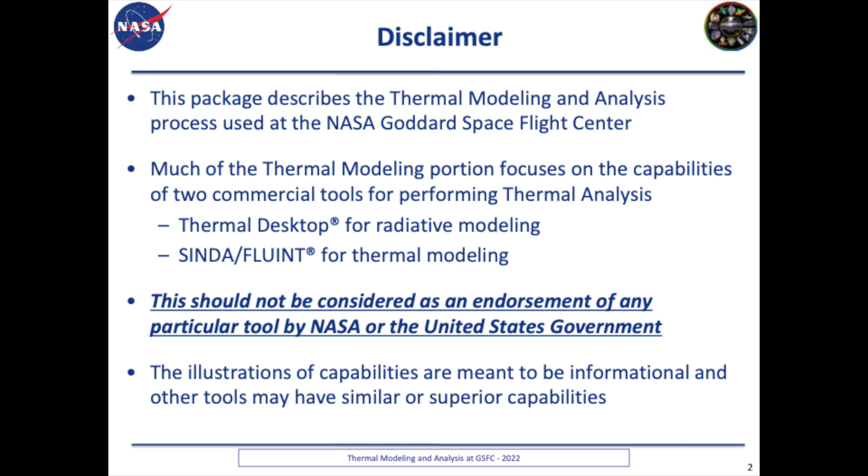All right, so we'll come now to the real part of this, which is analyzing the model predictions. This is one of the things some of our younger engineers struggle with. There's a very important difference between modeling and analysis. Modeling is: I build a model and I generate predictions. That can be done by the computer.

Analysis is the interpretation of those predictions to infer, discover weaknesses, insufficiencies, strengths in a design. The computer can't do that. It can't tell you that this is a good design, this is a bad design. That's up to you as a thermal analyst.

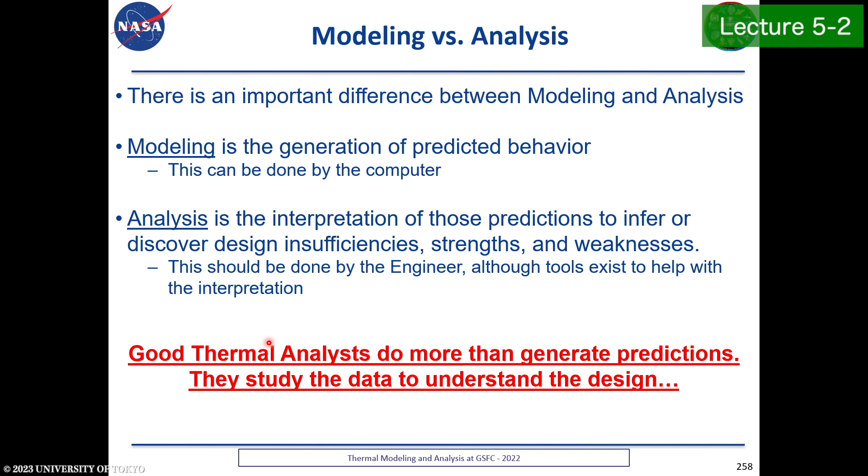So, a good thermal analyst does more than just generate the predictions. They look at the data, they understand the design, they investigate the heat flows, they truly understand the physics and make sure that the simulation is behaving as the physics of the problem dictates. So, don't think that as a thermal analyst, your job is to generate predictions and hand it off to somebody else to understand. Your job is to understand what those predictions are telling you.

So, to this end, there's verifying the results. Make sure that everything matches physics. One of the important things is, before you run an analysis, what did you expect it to do? You should not push the button to say go without any idea of what you expect. If I sized a radiator, I expect that radiator size to have given me temperatures within some range.

So, never go into it just saying, okay, I'm going to run a prediction and see what it is. Really think through before you run, what should I get out of this? Because that's the only way you can see whether anything makes sense or not.

So, we talked earlier about model correlation. That's a measure of how accurately the model predicts the actual measured values under the same conditions as your test. It does happen much later in the program because it takes a while before you get to a point where you actually have the hardware.

Doing what you can to configure your model to handle as many different cases is beneficial. You want to be able to produce the critical results that you need without the need to spend quite as much effort upfront post-processing. So if you know what you're interested in from your model, the data products that you want, you can make sure you tailor the output to give you that.

There are some post-processing tools out there, but knowing what you want before you run it lets you set it up, put it into an easy format, makes it easy to interpret. So setting up the tools to be able to post-process what you want is very useful.

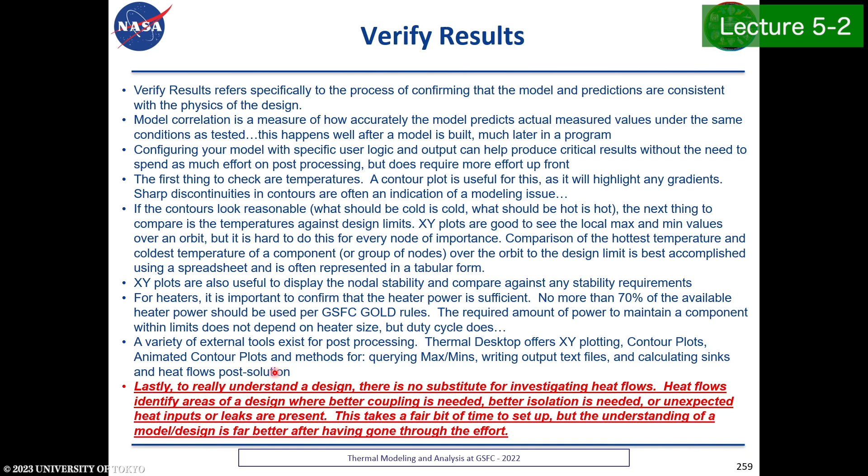You're an excellent thermal engineer when you understand where the heat's going throughout your design. So always strive to understand that and then be able to communicate it. When somebody asks you, well, why is this doing this? Well, because the heat went from here to here. This is what's causing us to be hot. I think somebody once said that temperatures are the footsteps left behind from heat flow. And I thought that was an insightful way to put it.

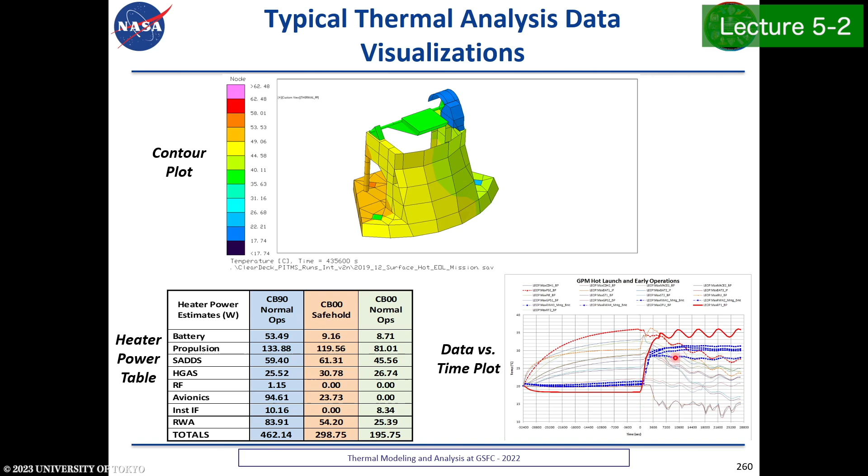So here are some typical data ways that you might look at things. This is a contour plot, so I can see what my temperature ranges are, what's cold. Here's a heater power table, so over different cases, how much heater power was used. Here's an XY plot of time versus temperature. This was a launch analysis, so we turned on some things and we launched. Some things got hotter, some things got cooler. So you get to see what the temperature evolution over time looks like.

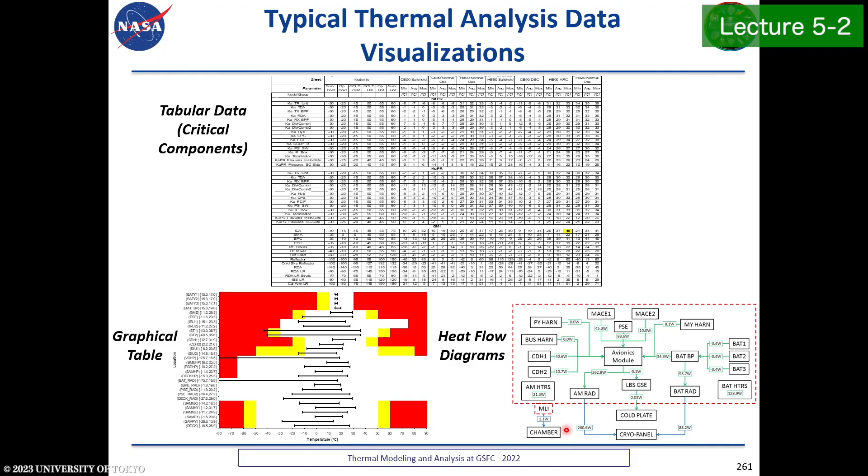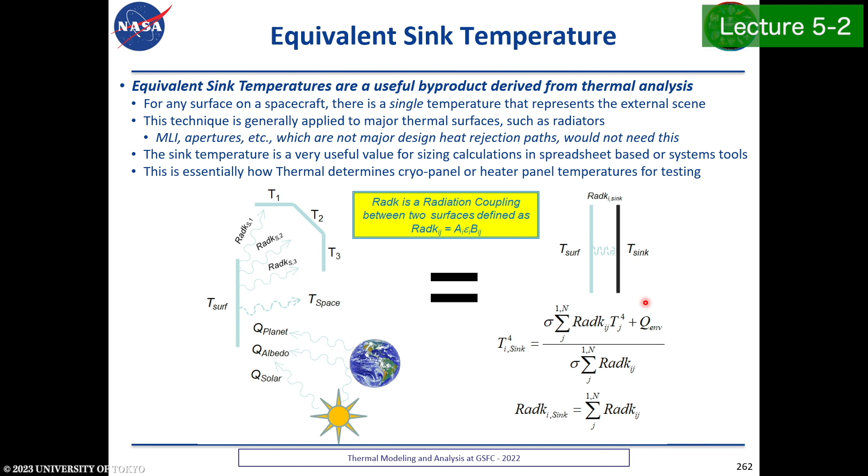And so if you go through and do all the math, it's basically the rad K times the temperature to the fourth of the surface in the field of view, add to that all the environmental backloading, and then divide that by the sum of the rad Ks, and that's equal to the sink temperature to the fourth. So sometimes you may have to further degrade the sink temperature. This is making an assumption that the emissivity that you would have here is 1. It's fully absorptive, but we all know that you're not going to get a cryo panel all the way up to 1. So you might have to have a slightly colder sink for the fact that you don't have full absorption at this cryo panel here.

So post-processing steps, figure out what you need to produce. Are you looking for temperature versus limit tables, looking for heater power tables, temperature versus time, or heat versus time? You're looking for contour plots, looking for heat flow diagrams, you're looking for backloads or equivalent sink temperatures. Based on what your data products are that you're to be reporting up to your stakeholders, you then determine what you need from the output file.

Do I need temperatures? Pretty much always. I don't know that I've ever run a thermal model and not output temperatures. Do I need the nodal heat loads applied? Pretty often. I'm interested in that. Do I need conductors? Maybe. Capacitances? Probably less frequently. Registers? Maybe I need those for heater processing. Maybe the heat loads would be sufficient. Do I need environmental loads? Am I trying to see, is my sun shield doing its job and preventing solar from getting through?

Do I need radiation couplings? Particularly, do I want to see what all the ones are to space? Using a text editor or Cygwin, Cygwin is a Unix emulation shell, can be a good way to say, give me all the rad Ks that are connected to this particular node or this group of nodes, or give me all the rad Ks to space from this particular set of nodes.

Do I need this everywhere? Are there specific ranges that I want this for? Maybe I'm only interested in the heat loads for the avionics. Can I ignore the MLI nodes? That's a place where I could say, hey, you know what? Everything that's 100,000 or 200,000 that's MLI, don't really care about it. So let me just output the things that aren't that.

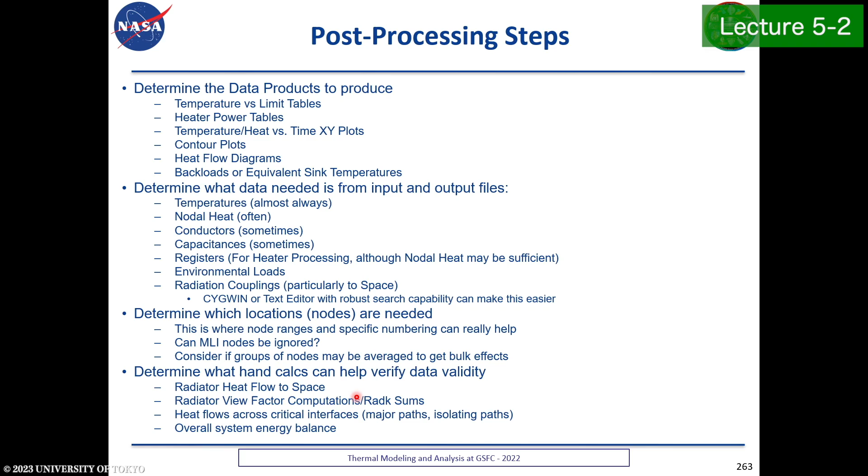So this is a tool that we developed at Goddard using the OpenTD API. It basically looks through the CondCap file and identifies from the comments in the different sections what are all the heat loads, what are all the heaters, what are all the PID controllers. It then takes that and figures out what logic it needs to add to the SINDA file before it runs to output relevant information. So for the heat loads, I want to know what's the power at each time step.

I also would like to know what's the average temperature of the nodes to where that power is applied. Heaters, I want to know what's the on-off point, what's the available power, what's the heater power at each time step. PID controllers, what's the process variable, what's the control variable. And so that logic gets written, and every time step it outputs this to the output file, and then we post-process that output file and bring that into Excel, and that's kind of our quick look thing.

So I get all of my heat loads, I get all the data at every time step, so I can now plot what the heater's doing. I never have to worry about missing a time step. I can get duty cycles out of it. I can rack and stack what the power summary is. I can reorganize things such that I know that this component or this sub-element, this instrument is this much heater power and this much survival heater power and this much dissipation, this much PID heat. So that's an example of what can be done with the API.

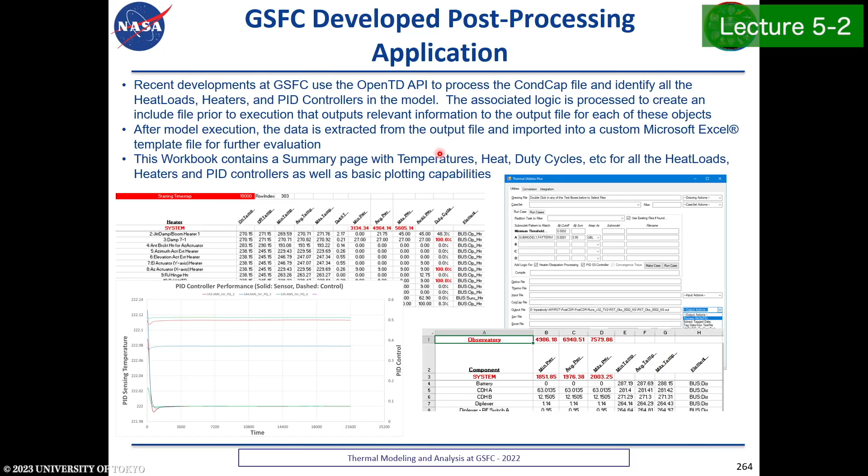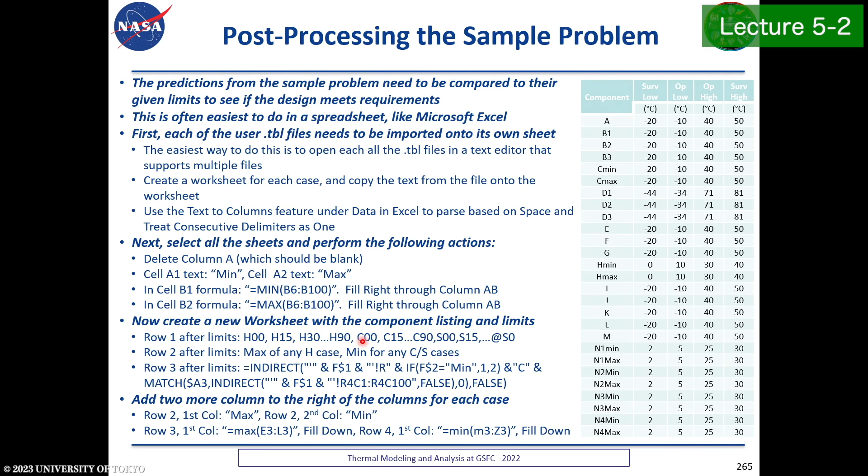So in this case, we went through some examples of post-processing the sample model problem. These were the temperature requirements that were given to us. So these were some example things to be able to bring in some of the user files, manipulate it into Excel, figure out the minimum, figure out the maximum, and this would give you some examples of how to create some of the workbooks, which would then be able to look and see over all my cases, what's my min, over all my cases, what's my max. And so we would look here and see, okay, these look pretty cold.

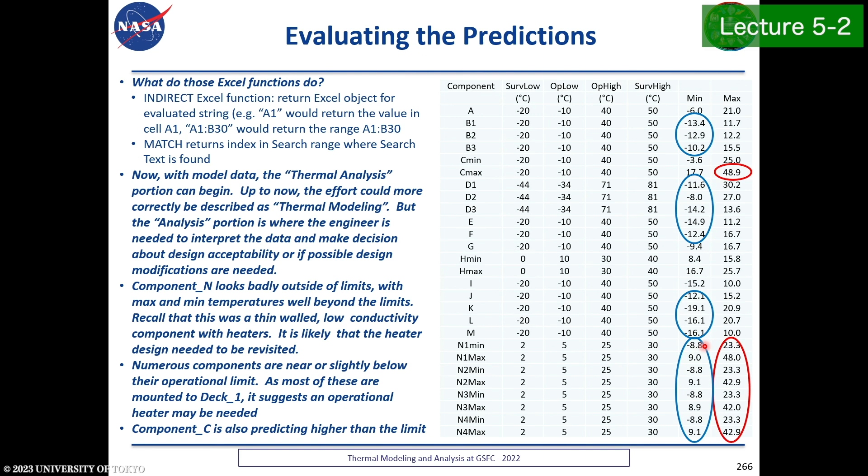These look pretty cold too, particularly compared to E here. This one is a little too hot. Down here I had some that were too cold. So that suggests that maybe I need some operational heaters to see what's going on. These were way out of where we wanted them to be. You can see some of them are well colder, some of them are well hotter. Certainly some problems there. So when we evaluated those, we figured out we needed to do some things differently.

So this all came from the user logic TBL files. We did go an alternate method where we said, let's just go and use the Thermal Desktop capabilities to gather that information out of the save files. So we would go through here, the post-processing, find the results, min-max task, and that would give us very similar information. So here, much like the table with the user logic to output, there's a slightly different syntax, but you can specify what information you're interested in pulling out of the save file and export it to a CSV file, which can then be brought back into Excel.

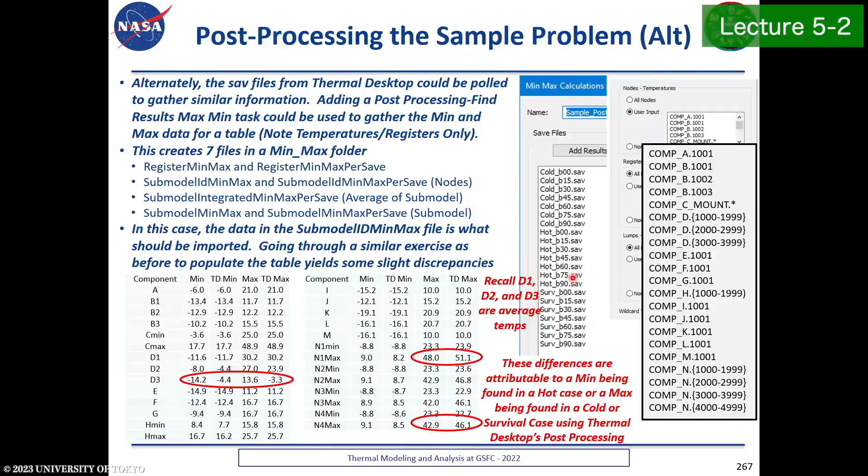So here we went through similar exercises and found that, okay, there were some differences. Basically, what we found was that there was a min being found in a hot case. When I did it first manually, I was only looking at cold cases under the assumption that that's where I would have it. So, when we got all of them, we basically got the same behavior out of it. So these are some of the hand checks that we can do.

So when we look through everything, the hot beta 75 produced most of the hot predicts. We ran that to make sure that it was good and set the output to all for the save file. So once we had everything in there, now we could look at the heat flows rather than just temperatures or Qs. You can try to do it through the QFlow from results, but sometimes it's easier to just use the model browser. And from that, you can say, give me the heat flows between submodels, and you could say, I want it between this submodel and all of them, or just between these two.

So we were looking at deck 1 and global from everything. So basically, where's all the heat going from deck 1? That was the avionics deck with all the boxes mounted to it. So we looked at that and said, okay, well, what's the orbit average power for everything? And that gave us about 243 watts of dissipation going into it. Adding 114 watts from component C gave us 357 watts total. So I've got my component C conducting into the sidewalls, coming up, going into the deck, all of my avionics. That total was 357 watts.

How much was going out? 378. All right, we're in the right neighborhood. Seems to be reasonable, within 6%, not bad. I'm going to get some solar loading that's going to leak through MLI and get in there. Another sanity check we did was, what are the rad Ks between deck 1, all the non-MLI nodes on deck 1, and space. So that produced a rad K sum of 1,560 inches squared. When we compared that to 0.89, which was the emissivity, times pi times the radius squared, and then subtracted off that center portion, that gave us an effective view factor of about 76% for the radiator. All right, want my radiator to have a pretty decent view to space, 75, 80%, pretty good.

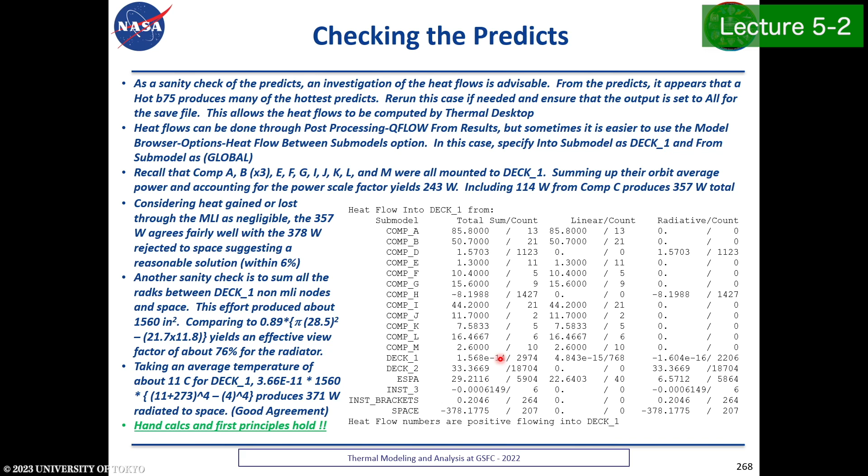And we looked and said, okay, well, let's assume that the deck is one temperature. If I take that 3.66e-11 sigma, multiplied by 1560 for the rad K sum here, average temperature of the deck of 11 C, converted to K, 371 watts radiated to space. Well, right in line with my 378. So sanity check. Seems reasonable. Nothing seems really far out here. Model seems to be behaving as far as physics is concerned.

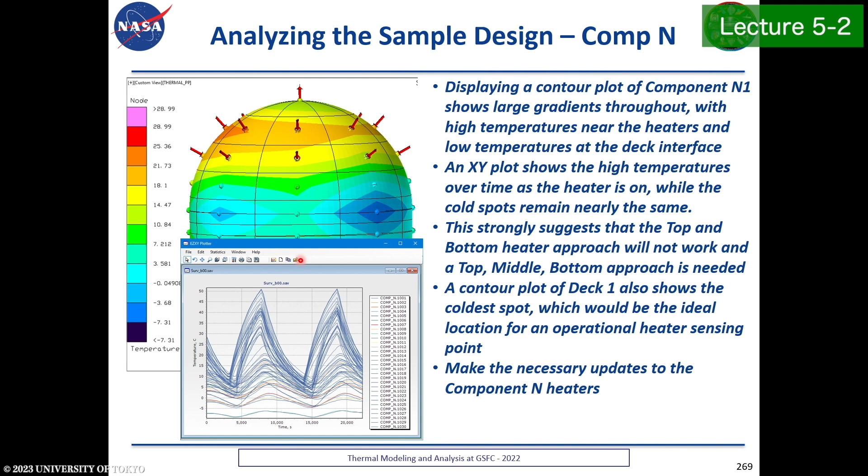We went through and did some contour plots on component N. We saw there were some very large gradients. So it turns out that some of these heaters had really high heat and temperatures on it. They would spike up here when the heater came on. Well, this was very thin and titanium. Not a big surprise that that was bad. So we ended up adding a bunch of aluminum tape over it to help smooth out the gradients. We relocated the heaters in some areas. We increased the conductivity around the sides so that it wasn't quite so isolated in order to try and bring that temperature down a little.

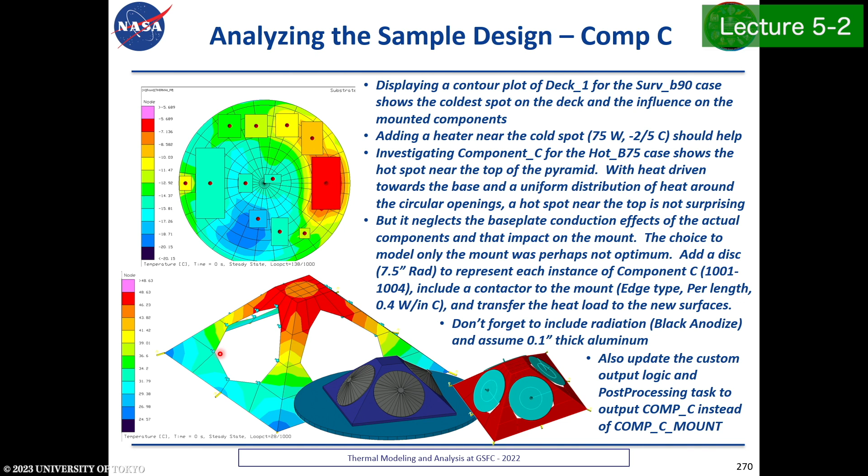Improve it by representing the base plate and then the conduction to the base plate, because I'm certainly going to want to conduct easier to the cold area than I'm going to want to conduct to the hot area that's got to fight its way all the way back down here. So, yes, this would be one temperature, but the heat flow is not going to be uniform around the outside.

So we went through, made some updates to things. Here's where we added in the effect of the tape. So here's where you can see a density multiplier for adding in some tape, added in a U and a V conductivity improvement, so that made it so that the tape effects were modeled in there. We also took a look at the heater power usage, so you can post-process the heaters, and you can figure out exactly which things you wish to output from here. One of the ones that they do give you is duty cycle, which is handy to have.

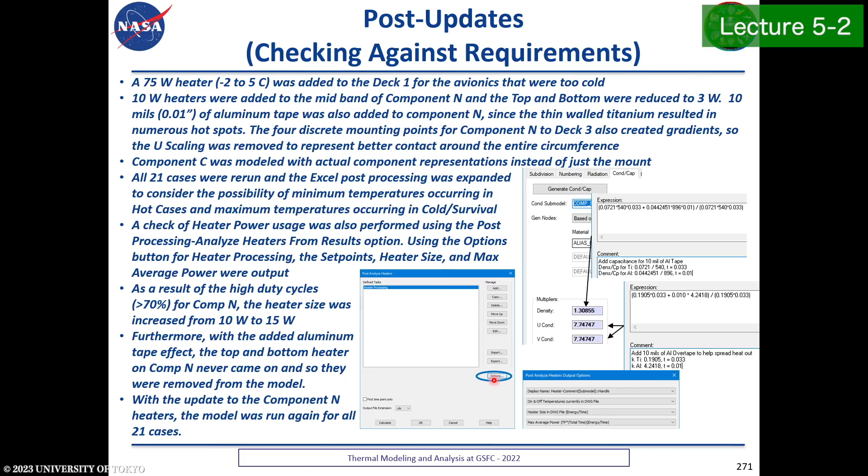So when we processed that, looked at the outputs, this looks considerably better now with our things. But we did notice that there was some strange behavior in just the hot beta 75 case. So why is that one bad and all the rest okay? Well, turns out that shrinking this a little bit too much, hot beta 75, there's a small gap there. When we got in there, there's some sun, so that was heating things up. So we increased the radius to close out that gap a little bit better, and then we got things behaving much better because we weren't getting this solar illumination on the outside of component N.

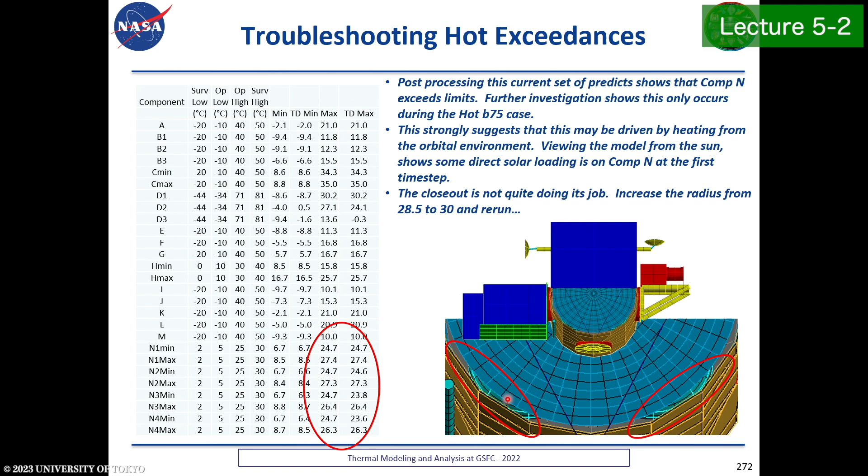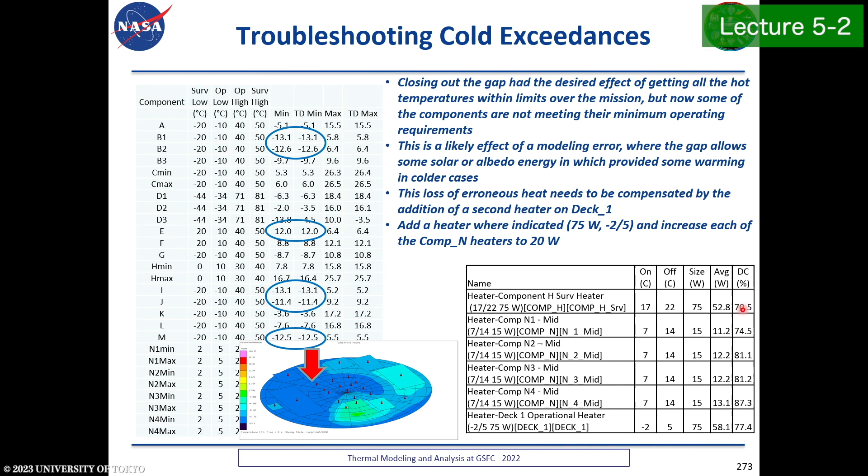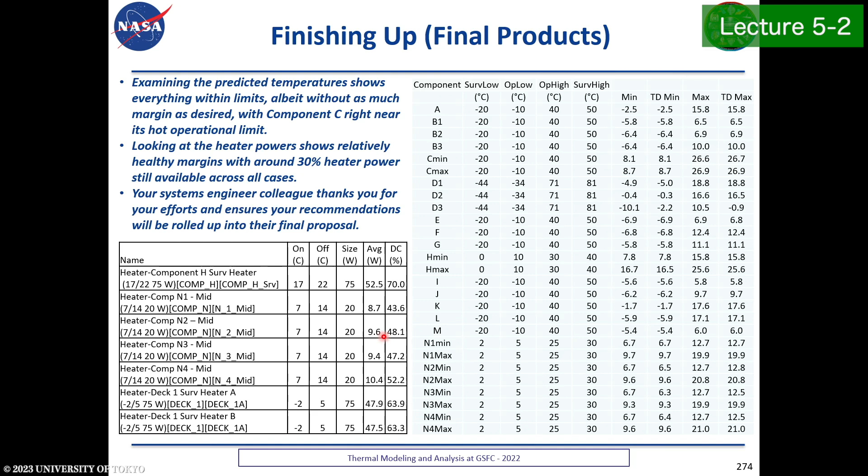Cold exceedances, well, how do you solve a cold problem? You add a heater. So we added some extra heaters to this deck, put in the sizes, and lo and behold, here's some of the duty cycles, a little higher than we'd like, increased some of the sizes, and then came up with what those sizes need to be. So here we have everything within its limits. We have the heaters sized appropriately to give me sufficient duty cycle on things, and we handed off our results to the systems engineer who asked us for it. He thanked us and begged us to come work the project when they win the proposal.

So to close everything out, every thermal analysis should begin with expected performance. How do you determine whether your results are reasonable if you don't know what to expect? The analysis of the model predictions is the responsibility of the thermal engineer. Your job is not just to generate predictions, it's to analyze the data that you have. Trust the results after you've done some basic verifications with hand calcs and first principles. And trust your judgment. If something doesn't look right, look a little deeper under the surface, figure out what's going on.

Anticipate the data you're going to need from the model. Very often you only need a small fraction of the overall model to produce the data products that are going to be asked for. Automating that post-processing can take a little bit of upfront time, but if you have to do it over and over and over again, that setup will really help you because you'll be able to more efficiently bring the data in and look at the results.

Very often, you may fix one thing and you break something else. So there's often unintended consequences. Solve one problem and another problem pops up. So make sure you understand why it's doing it. That's part of your job, to understand the behavior of the system and figure out what's going on. If something unexpected occurs due to a model update, you brought something in and now all of a sudden it's broken, understand why that is. Is it something that is physics or is it a modeling error?

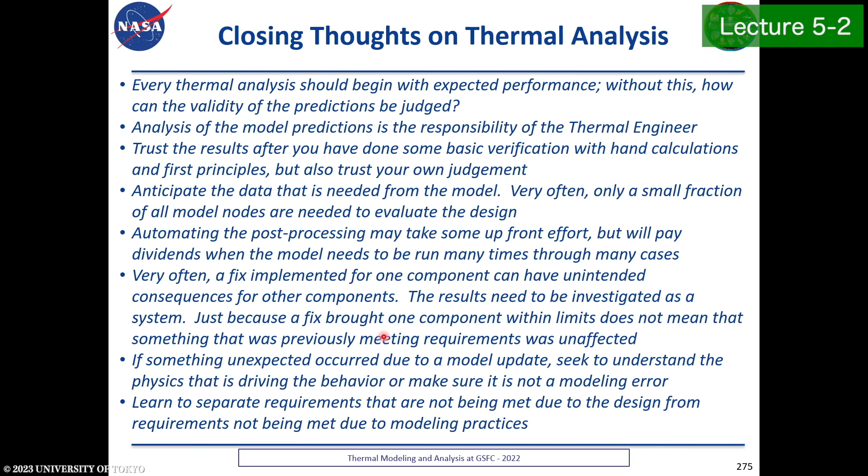All right, so to wrap it all up, thermal analysis is a cost-efficient way for us to use computer simulations to explore design space, verify that things meet requirements. Much cheaper than build and test, build and test, build and test. Most spacecraft analyses use the geometry model to compute the radiative exchange and the environments, which feeds into a thermal network model that predicts the temperatures and heater powers.

We've got a pretty solid process for building that and verifying the inputs prior to execution. It certainly helps to understand what the code's doing behind the scenes. Not required, but it's certainly helpful to understand what the algorithms are doing if you ever need to troubleshoot to see why it's not doing what you expect. It's your job as an engineer to make sure that the predictions are reasonable based on the physics of the solution and synthesize those predicts from the model into useful data products for the stakeholders.

And physics is physics. If your model's telling you something that doesn't make sense, check the physics. If the design does not or cannot meet requirements, laws of physics must still apply. Yeah, you'd like it to be under 40 C, but you haven't given me enough space for a radiator. I can't do it. I can't bend physics to do things that are impossible.

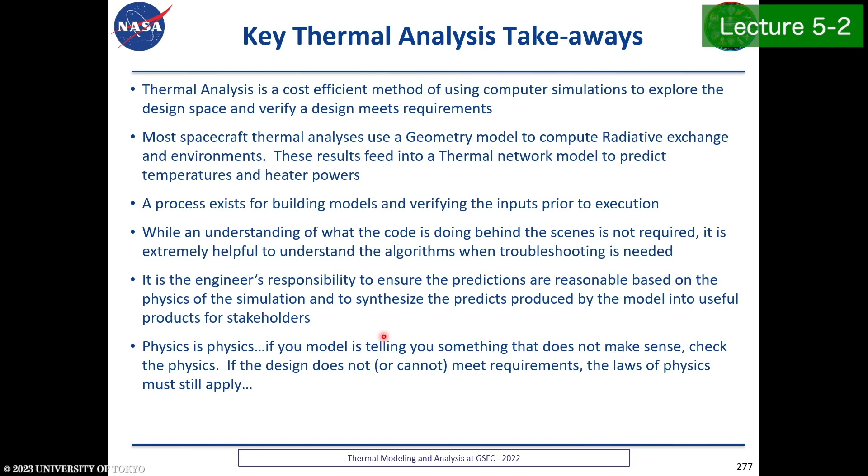So always make sure you understand the physics and the constraints of the resources that you have, and be able to explain that to the stakeholders that they either need to relax requirements or give you more resources to be able to do the job. But physics is physics. You can't make physics bend to your will if the constraints are such.